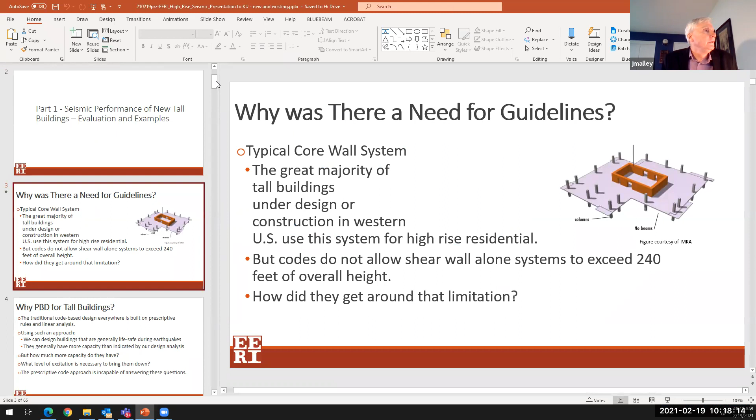Oops. And see if I can. Okay, hopefully I'm still sharing. Still sharing? That look okay? Okay, cool. Great. All right, so let's get into the meat of the presentation then.

Seismic evaluation of tall building projects using performance-based earthquake engineering. Actually, it's not just existing—I should have gotten rid of the word existing, just tall building projects using performance-based earthquake engineering. As I mentioned, there are 2 parts.

The first part is on performance of new tall buildings. I'm going to go through how the process works, and then talk about some specific examples of projects that I've been involved with as a peer reviewer, which is a big part of this whole program.

We use guideline documents, and I'll go into those in a couple of minutes, but a lot of the projects we've been looking at are what we call core wall systems.

Many of the large condominium towers and apartment towers going up in major cities on the West Coast have a primary lateral system that is reinforced concrete shear walls around the elevator, stairs, and mechanical shaft core of the building. This system is not really allowed by our building codes right now in high seismic zones over 240 feet, unless you have a moment frame system, a sort of dual system, which is what's allowed for taller buildings when you want to use a shear wall building.

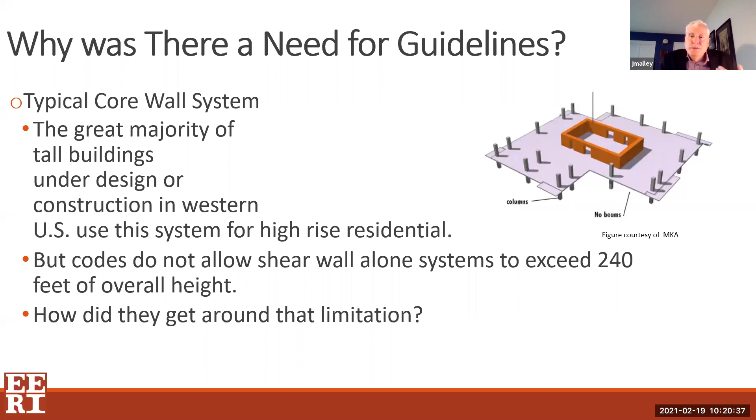Architecturally, that presented challenges with the idea of getting full sight lines from condominiums, etc. They didn't really want a deep reinforced concrete moment frame around the perimeter of the building. So the engineers started to wonder if they could go outside the bounds of the prescriptive building codes and try to do just the core of a reinforced concrete lateral system, and be able to demonstrate that it would perform properly.

Traditional code design is built on prescriptive rules and linear analysis. It's been built up over the last almost 70, 75 years, and it really has grown over time, become more and more complicated, but is still based on some pretty simple concepts.

For earthquake design, we're really trying for life safety for most all the buildings. We really think many of the buildings have more capacity than what we give them credit for in the building code. Again, because it's a fairly simple procedure, you're going to be a little more conservative on things. So we ask questions like: how much capacity do we really have?

We really don't have a great idea how big an earthquake it takes to bring buildings down. We don't want to think about collapse, but we want to know at what point our structures are really going to be vulnerable to severe damage in an earthquake. And the code really can't get us there.

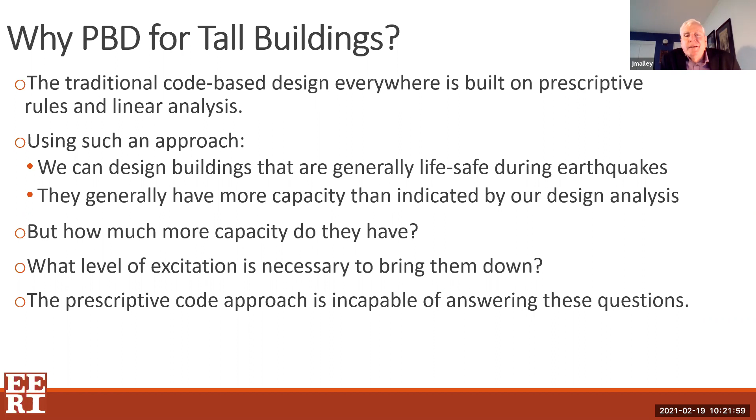So we needed to think about this special class of buildings, because the building code doesn't really address very well long period structures, which have modes of response different from the simple approach covered in the building code. P-delta effects become more important when you get into large displacements, and with longer periods you can have larger displacements. That's an important consideration for the collapse potential of tall buildings.

Obviously these buildings can potentially have large occupancies, especially if used for office buildings. And that could impact not just the building if there's a collapse, but all the surrounding buildings around it. You can imagine having to cordon off after an earthquake. If there was major damage to one of these buildings, you might have to evacuate blocks in all directions around the building.

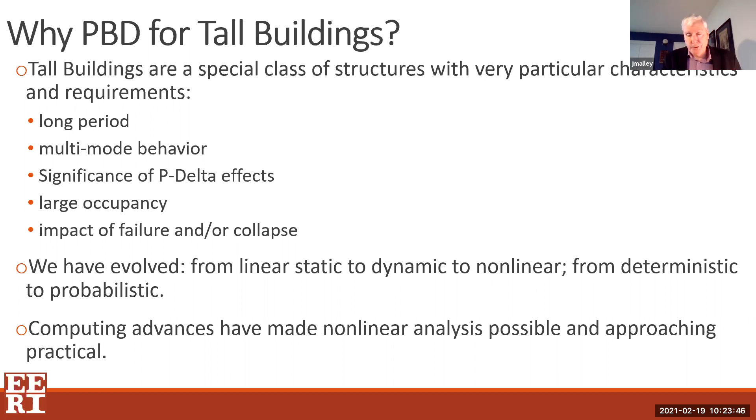We've also come a long way in our ability to do analysis. We go from linear static to linear dynamic to nonlinear static and dynamic, and from deterministic, one level of demand, to probabilistic, using multiple levels of demand to understand building performance. The ability of computers to do calculations we never could do before, and manage data in ways we never could imagine before, really allows us to move forward with this more detailed approach to analysis than ever was possible.

So when you get up to 30, 40, 50 stories, you're talking about a very small fraction of the number of buildings. The fact that building codes do not really target this small sliver of the pie makes sense, right? Engineers recognize that now, and we're trying to search out better ways to design these buildings.

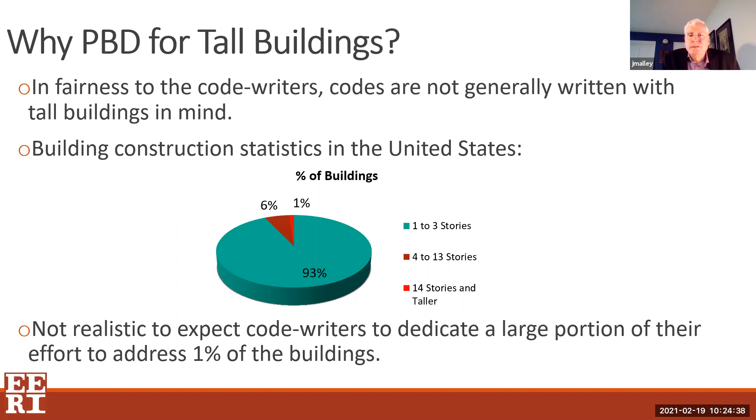So understanding system performance outside of building code definitions becomes very challenging. There are some ways to do it. There's a FEMA P695 approach, which requires hundreds and hundreds of nonlinear analyses, maybe thousands and thousands, to pre-qualify a new building system. For an individual building, that just doesn't make sense.

So we wanted a more reasonable approach using what we call capacity-based approaches to design, which are incorporated into the building code in many ways, and continue that in looking at some of these more unique structures. Really, one of the important things is to think about is that for earthquakes, it's much more important to think about deformations than it is about forces.

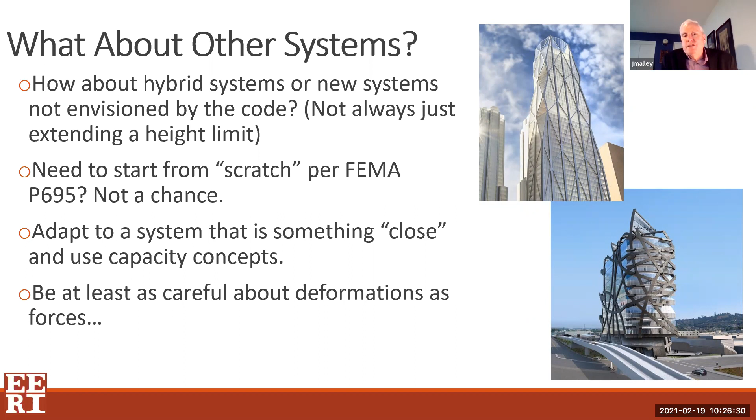Most of the building code requirements are force-based because, again, they go back far into the distant past. But really, when we think about earthquakes, we want to be controlling deformations, because deformations -- that P-delta movement -- is what really brings buildings down. And so that's what we have to be focused on.

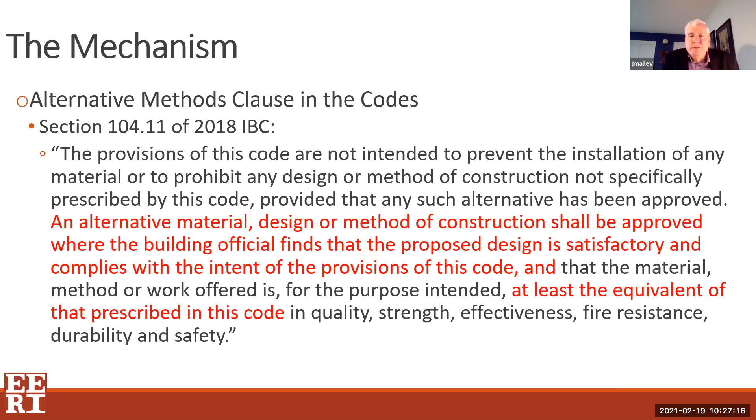So ASCE 7 has a similar clause that allows the engineer to bring forward new ideas and to bring forward an approach or a system that's not specifically permitted by Table 12.2.1, which lists all the permitted systems, if you can show that you have similar performance that you would have from one of the defined systems.

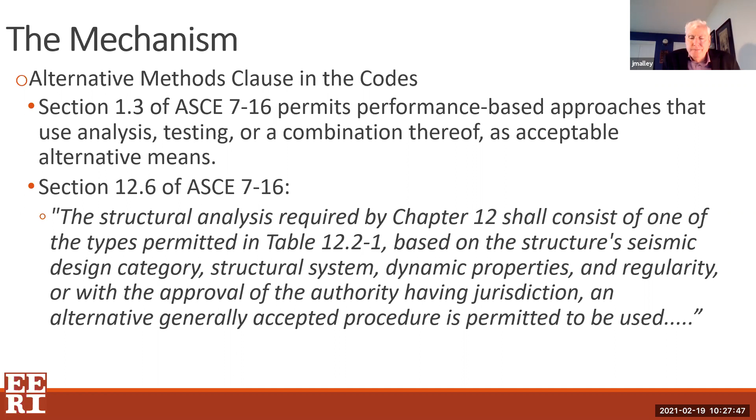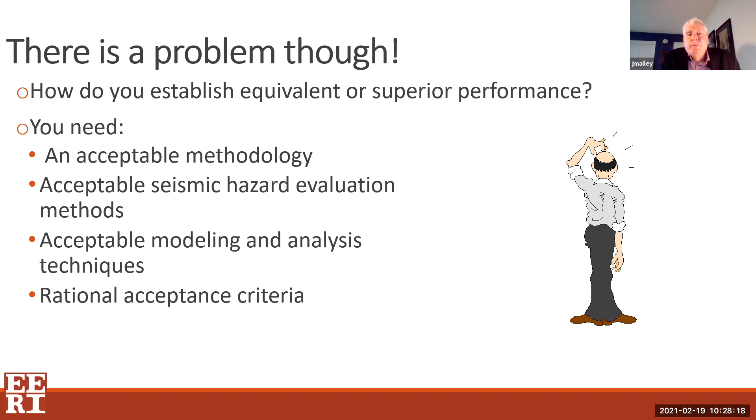But there's somewhat of a problem with this. How do you establish equivalency, or establish if it's even better than what code performance is? You need some kind of methodology—how do you establish what's the acceptable seismic hazard, what are the methods to do that, what's the acceptable modeling and analysis techniques, since we are going beyond linear analysis now, and what's a rational acceptance criteria.

Guidelines have been established over the last 10 or so years. The two primary ones are the PEER, which is the Pacific Earthquake Engineering Research Center Tall Buildings Initiative guidelines, as well as the Los Angeles Tall Building Structural Design Council guideline document.

Some cities, like San Francisco, have put together administrative guidance on how to do this, but not the technical work. And the fourth document is from the Council on Tall Buildings and Urban Habitat on tall building design. It's very general—good information, but really isn't directly helpful to engineers trying to accomplish one of these designs.

As I mentioned, the PEER Tall Buildings Initiative guideline and the LATB SDC guideline are the two most widely used. They work with ASCE 7 as well as ASCE 41, which is a document on the seismic evaluation and retrofit of existing buildings that has a lot of performance-based concepts in it, and some ATC documents sponsored by NIST on nonlinear modeling approaches.

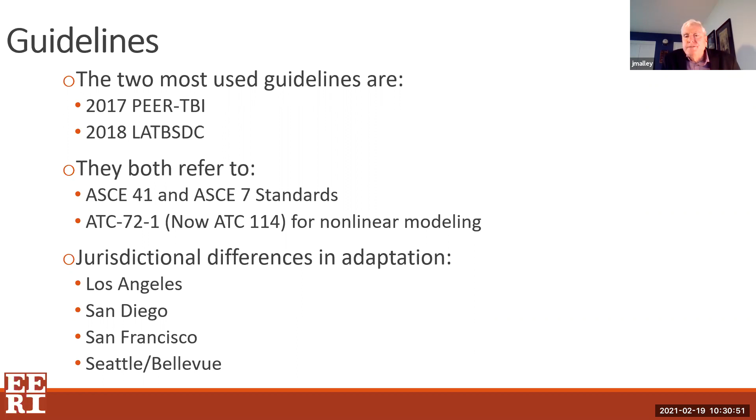Each of the jurisdictions I've worked with deal with this a little bit differently. One thing common to all the programs or cities is that they get a peer review panel—generally one or two engineers, a practicing structural engineer, oftentimes an academic that has expertise in the type of structural system being proposed for the building, as well as someone who's an expert in ground motion development, because we have to develop ground motions to simulate the kinds of earthquakes the building will be subjected to. Each does that a little bit differently, but that program is always in place.

Performance objectives are a little bit different for the guidelines than code-based approaches, where we generally have one level where we look at a 10 in 50, or 475-year return period event. For the two guideline documents we work with, mostly the PEER and the LA Tall Buildings, we have two levels. We have a serviceability earthquake, which is a pretty small earthquake, frankly—50% in 30-year chance of exceedance. And for that earthquake, we basically say the building needs to remain elastic.

So we check it using elastic procedures to make sure essentially that the building is performing, or the models are performing the way we would think they should, since we have a lot of background in elastic analysis.

And then going forward to the very rare event, which is what we call the maximum considered earthquake—that's a 2% in 50 return period generally, a very large earthquake, the largest you would consider possible in the region you're in.

The ASCE 7 Chapter 16 now has guidance on how to develop that. It didn't in the past—that was partly developed by the guidelines, and then ASCE 7 picked that up from the PEER TBI and the LA Tall Buildings guidelines. So that's now in the code, which is nice.

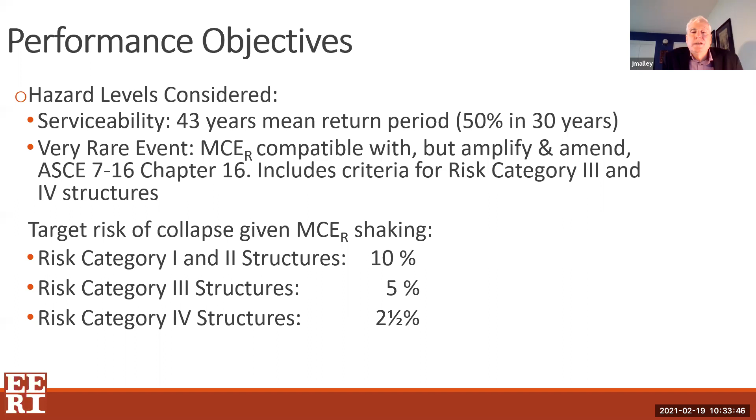You can see the targeted risk of collapse for the different categories at the bottom. As we get out to risk category 4, we're talking about a 2.5% chance of exceedance, or risk of collapse, given this very large earthquake. So still a very small chance of collapse, even given the largest earthquake that could occur in the region.

Talked about capacity design. I mentioned that a little bit ago. Very important conceptually as we're putting together seismic design systems and configurations for buildings. We'll talk a little bit about that in the next couple of slides.

The idea is that we want to control where the nonlinear response in the building is going to occur during the earthquake. We can't design for the biggest earthquake considered for the building to remain completely elastic, because we wouldn't be able to design real buildings in effect—there'd be so much structure that there wouldn't be any windows and things like that. Nuclear power plants are about the only thing designed to be elastic for this very large earthquake. So we know we're going to have some inelastic behavior.

We want to control where that's going to be, and make sure that everything else around those inelastic elements remains elastic, so they hold up the rest of the building. So that covers some of those things.

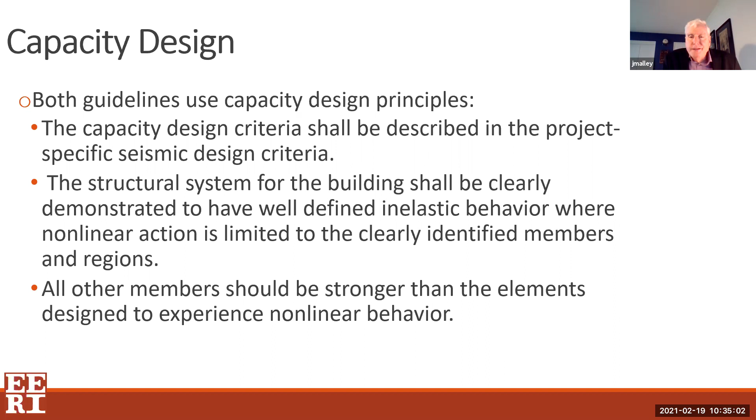What we do then is classify the structural actions as either force controlled or deformation controlled. The deformation controlled elements are the ones we expect to yield and deform nonlinearly in an earthquake. The force controlled elements stay elastic, and are made stronger than the deformation controlled elements they're connected to, so we limit the demand on those elements. There are 3 categories for force control, as you'll see in a second.

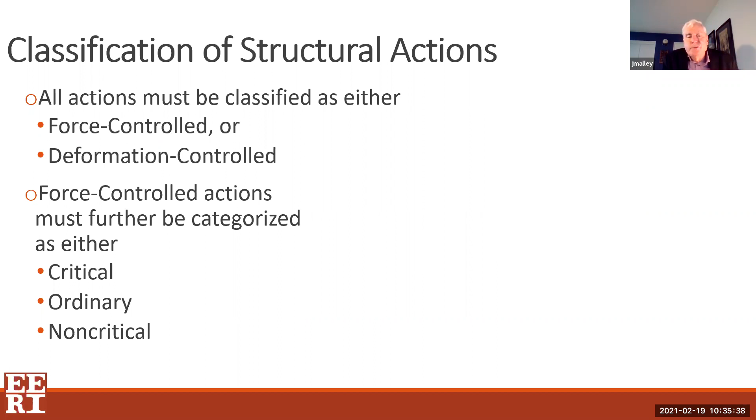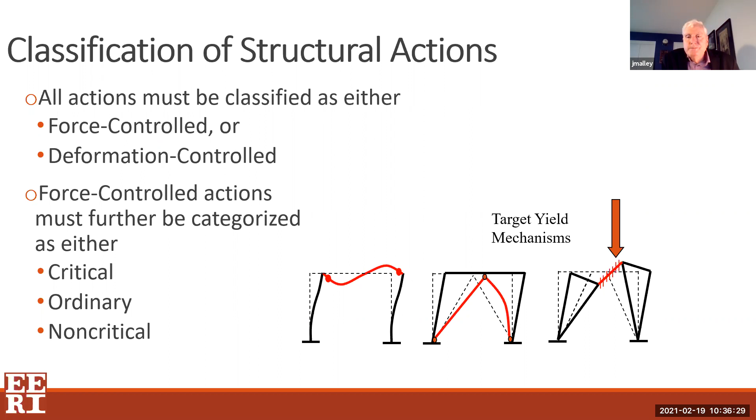When we think about the deformation controlled elements in our nonlinear models, we let those go nonlinear. We watch their deformations and make sure they are within the bounds of what these elements have been demonstrated to deliver in tests done at universities around the country—whether it's a moment frame connection, a link beam in an eccentric brace frame, or the buckling deformations in a buckling restrained brace frame system.

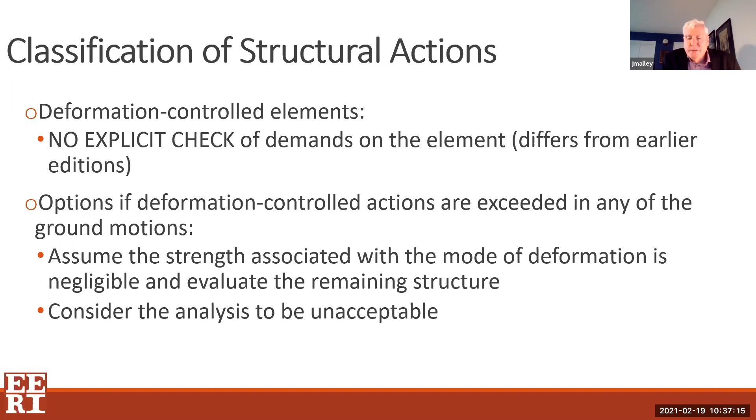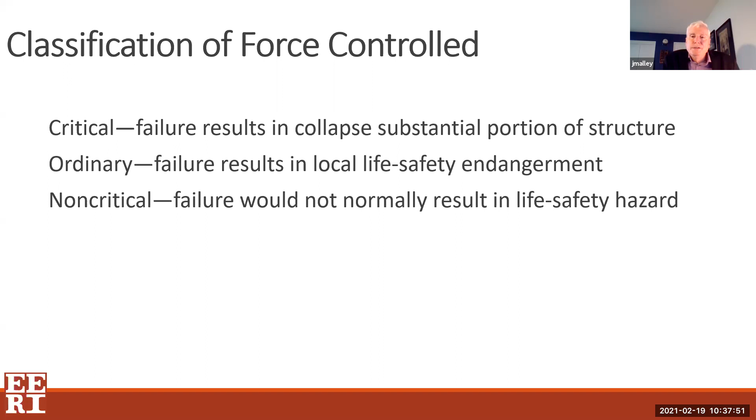Let's see, I think we can just go past that. On the force controlled side, we talk about critical, ordinary, and non-critical elements. If it's a critical element, its failure could result in a major collapse of the building—imagine a very important column would be a critical element. Some of the other elements are checked for less demanding criteria; if we lose them, we don't really feel there's a significant life safety hazard.

When we look at the ground motions, we have different criteria depending on what risk category you're in. On many tall buildings now, we generally do 2 suites of 11 ground motions. We can't get into why 11—it's a strange number, but there's statistics behind it. We generally use 2 suites because there's a significant second mode of response that can control the design; if you only do 1 suite, the ground motions won't be targeted or characteristic to the 2 primary modes of response. So we've moved to what we call a conditional mean spectrum approach, or multi-suite approach.

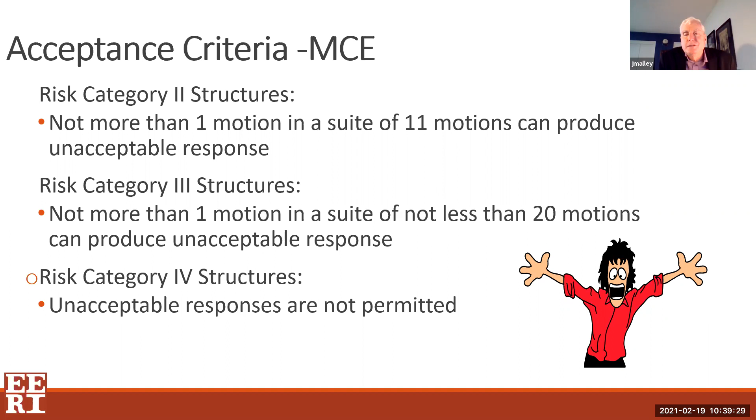So when we do these nonlinear analyses, if you run into one ground motion that seems to go beyond what we consider acceptable deformations in the structure, we've determined you can still be demonstrated to have that acceptable level of chance of collapse given the MCE earthquake. For the higher risk category, we don't allow any of those ground motions to exceed the criteria, unless on risk category 3, you use 20 ground motions instead of 11, which doesn't really seem to happen in practice.

Okay, analysis. So there are a number of checks we have to make on each individual analysis, and I won't read through all of those, for whether or not the model has given us acceptable performance. A couple of the key ones are the maximum drift the building goes through, the interstory drift, which is the deformation between two stories, or the residual story drift.

So that's when the earthquake is over, and if there is some out-of-plumbness of the building due to residual drift. This is the first time in seismic engineering in the United States that we've ever been able to check, or been asked to check, on residual drift. And it's a very hard thing for us to estimate accurately—I'm still not convinced we do it that accurately. Generally, most of the buildings we look at, the residual drift doesn't seem to control, which is good, because like I said, I'm pretty skeptical about our ability to predict this.

But it's the first, and I think it's a really important thing, because after the earthquake, if you're standing across the street from a tall building and you can see it leaning over, if you're the building official, what are you going to do? Are you going to evacuate 8 square blocks or whatever, because that building, if there's an aftershock, might not have the capacity left to resist a major aftershock. So luckily we haven't had to deal with anything like that in past earthquakes, but in the next earthquake we may not be so lucky.

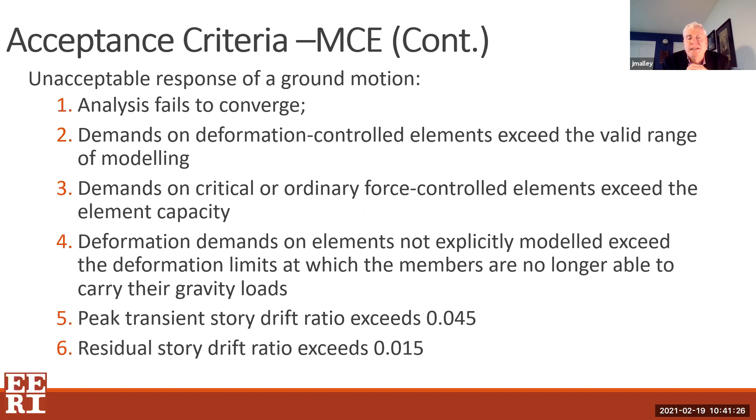Okay, let's go here. So on evaluation procedures, we need to develop 3-dimensional models. We need to put together realistic estimates of stiffness, strength, damping, etc. And then damping is pretty tricky for these nonlinear analyses, because a lot of what we consider damping in our elastic models, where we use a simple rule like 5% viscous damping...

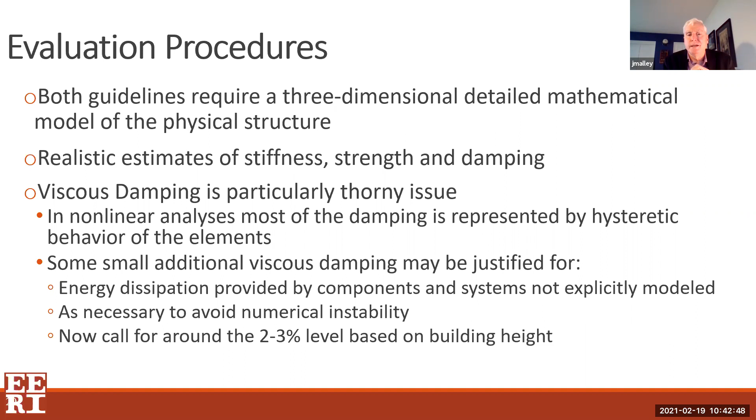That includes the consideration of the inelastic or hysteretic response of the structure, where it's dissipating energy by yielding in those various deformation-controlled elements. So when we do a nonlinear analysis, we have to pull that out and then try to get the other type of viscous damping that could be in the building from other elements that are not part of the lateral or structural system we consider. Cladding, for example, can provide some damping, along with other parts of the structure. Generally we're down in the 2% range, especially for the tall buildings we're working with, as the damping. So that's always a point of discussion when we get into the review of these buildings.

So then we have these nonlinear models, and generally we use what we call concentrated plasticity models—so like a plastic hinge, if you will, for beams and columns, to estimate the nonlinear response of that element.

For walls, we use what are called fiber models, where you can imagine if you've got a wall, you would have a series of fibers that would estimate the strain and force demands that fiber goes through when the wall goes through lateral response. It has some yielding elements so you can watch the yielding go through the different parts of the wall. So it gets into a lot more complicated modeling than we typically do with our elastic models.

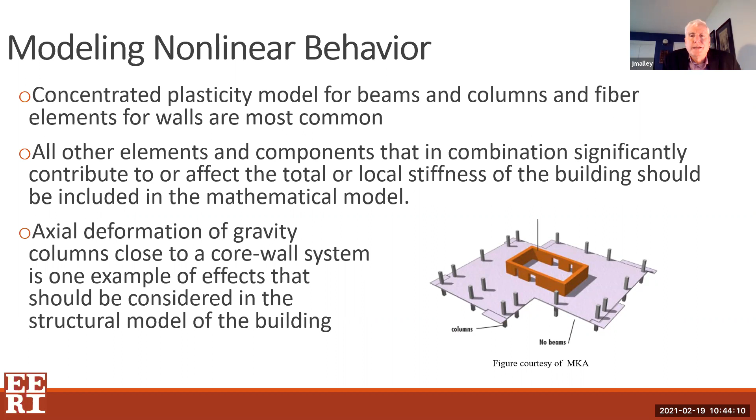Let's see—so axial deformation of gravity columns can be important in these taller buildings and often needs to be considered in the model. I'll talk a little bit about that in some case studies here in a second. One thing that's very important for tall buildings is that generally when they hit the ground level, they oftentimes increase in size, and we call them podiums.

They could be like a retail space for a couple of floors, or offices, etc. Parking garages also sometimes are above grade, or they could be below grade. So the structural system has this change in its characteristics in many of these taller buildings.

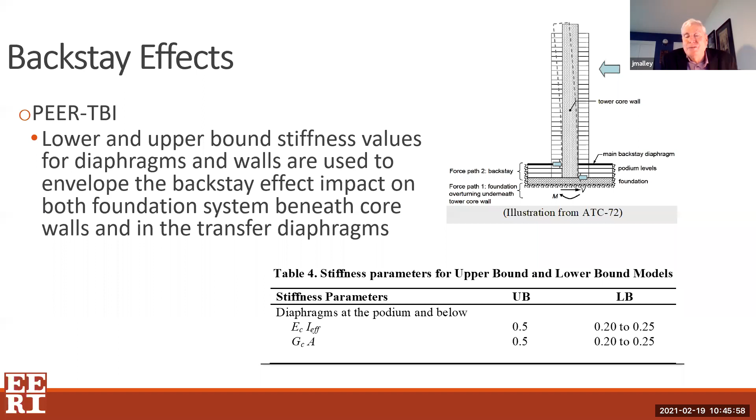That transfer diaphragm is probably the most important element in the entire building to understand its performance, because it can potentially have huge forces in it. If we don't design it properly, the whole system could kind of disintegrate and have a response that we weren't planning on. So we do a lot of extra study on these transfer diaphragms, different considerations of stiffness and strength, and some very detailed strut and tie type analyses a lot of times. They're often very thick, sometimes up to 18 inches thick. I've seen even 24 inches thick in some cases.

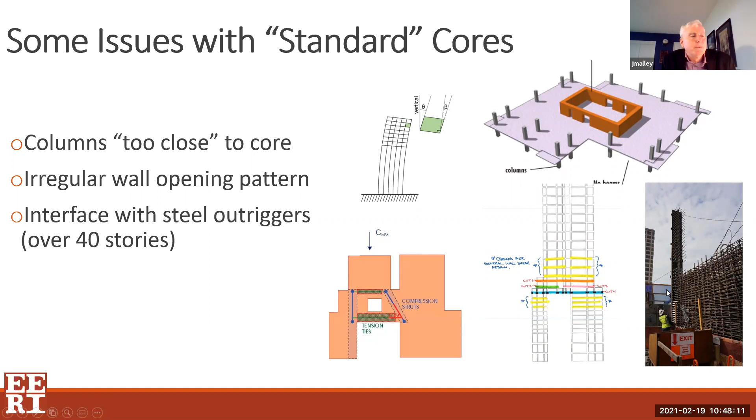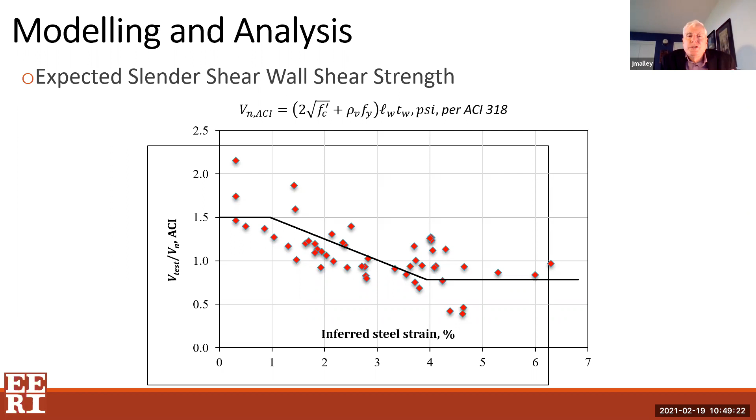So we can take advantage of that because many of these shear walls are fairly slender. We really are reaching out for as much strength as we can when we're doing these performance-based type designs.

Okay, well, let's get into some of the peer reviews that I've done over the past 15 or 20 years on various types of projects, not all tall, but they all had some very interesting things to deal with.

It's on probably the worst soil almost in all of San Francisco. I think about maybe 30 or 40% of the cost of the structure was the foundation because it was on such horrible soil. It was so bad that they had to put in special foundations under, even the field would have sunk. So they had to put a foundation under not just the structure, but the field itself, because the ground was so bad.

It's an interesting structure in that it is a combination of concrete and steel. The architect wanted all of the exposed structure, while you're sitting in your seat or in the concourses, to be steel, because he was trying to evoke older stadium designs from the Wrigley Field or Fenway Park days. But the engineer thought it was going to be more economical to use a concrete type frame structure. So there were some interesting challenges with the interaction between the steel and the concrete.

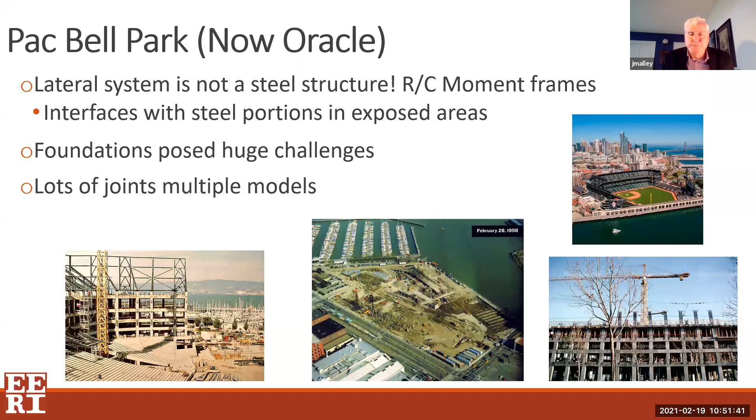Another one that was very interesting in San Francisco is the De Young Museum, which is in Golden Gate Park, not too far from the ocean. Very interesting project architecturally. One of the things that's interesting about museums is base isolation technology. Base isolation is used to separate the movement of the ground from the structure above the isolation plane. Museums are a great candidate for isolation because the contents are invaluable in many cases. It's not only protecting the structure, but it also reduces the demand or shaking intensity above the isolation plane, to the point where you can protect fragile items like porcelain and glassware from being damaged in an earthquake.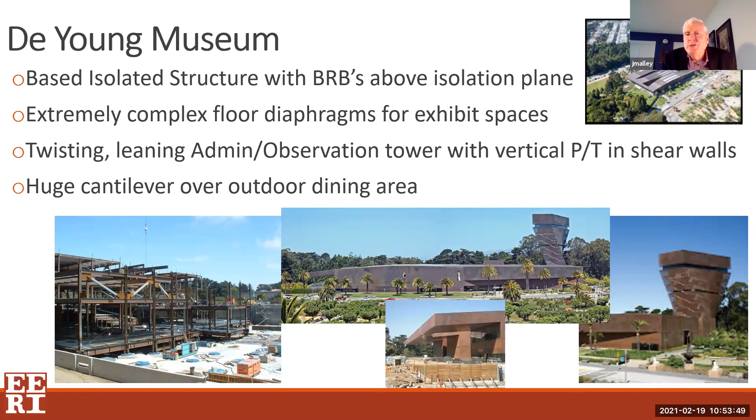So in this case, they isolated the main museum. They also had a very complex observatory tower, which you can see on the far right, that sort of twisted and leaned as it went up. It had a tendency to potentially ratchet because the center of mass and the center of stiffness - the core was vertical, but the center of mass changed along the height of the building and twisted. So if the earthquake started, it could have torsional modes that might have twisted it into very damaging processes. What the engineer did, which I thought was a great idea, was put vertical post-tensioning into the concrete core in order to avoid that ratcheting type of behavior, because the mass was changing over the height of the building. Really an interesting project to look at.

LA Live is down in downtown Los Angeles. It's 54 stories. It's the tallest steel plate shear wall building in the world. The idea with steel plate shear walls was replacing the concrete core walls. Architecturally, they were looking at an all-steel building, but originally the engineer thought, well, I'll just do concrete cores with steel frames. The steel fabricator and the general contractor said that creates a real problem for construction when you're sharing the trades like that. The integration between concrete and steel can present challenges because tolerances are tighter on steel than on concrete, and then the steel has to connect to the concrete. There can be all kinds of problems during construction. So they went with the steel plate shear wall in this case.

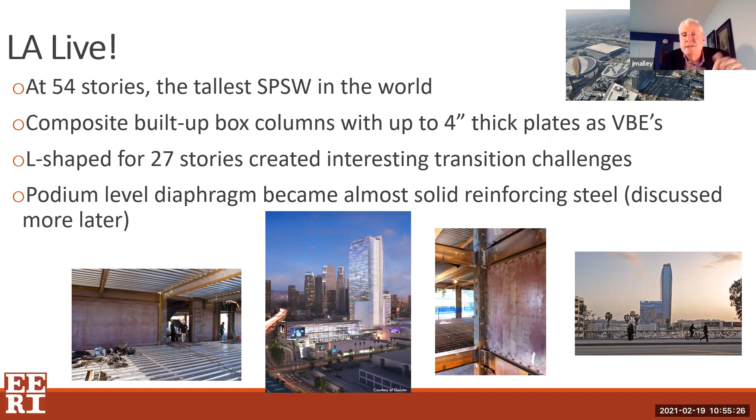It's an L-shaped building for 27 stories, and then just a tower for the condominiums above level 27. You can kind of see that in the picture on the lower right. There's a hotel that does the 27-story part of the L. So there are some interesting diaphragm challenges - there's a transfer diaphragm at the roof of the low rise that creates interesting force challenges, as well as down at the ground floor. We can talk through that as we go forward.

One of the things that was interesting about the analysis here was that, generally to ease the design process, design engineers typically assume rigid diaphragms.

It helps to cut down the size of the analysis and the speed that you can do it. Unfortunately, in this case, when they had that L connecting in at those upper floors, there was going to be some major force transfers at that low roof.

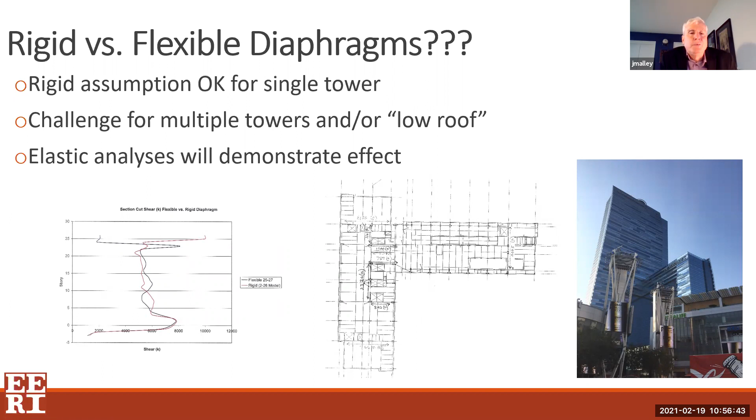So the engineer had to modify their diaphragm design to use what we call flexible or semi-rigid, or they had to model the stiffness of the diaphragms in that region above and below that transfer at the roof, in order to make sure that they properly captured how those forces were going to transfer between the core walls that are in the main tower, and then there's a lateral element out here, a small core for the hotel part of the tower. So again, a little bit of a challenge for that building.

Wilshire Grand is the tallest building west of Chicago at about 72 stories, downtown Los Angeles. This is one of the buildings where they went with a combination of steel and a concrete core. It's a very narrow building in the short direction.

So we had to do what we call outriggers, and I'll go into that a little bit more in the next slide. But they also use what we call belt trusses around the perimeter at the outrigger level, to help equal out the forces in the columns all the way around the perimeter, to get better performance overall in the building. It used what we call submerged arc welding in the field for some of these. There were some massive, like 2-story tall gusset plates to connect, and I'll show those on the next slide, to connect one of the outrigger braces into the core. This was a technique that let them do that welding much more quickly.

Also had the largest concrete pour in the history of the world. I think it still is. It was a 21-foot thick mat over the entire footprint of the building, and it was 22,000 yards of concrete that was poured in one continuous pour that took place over about 12 hours.

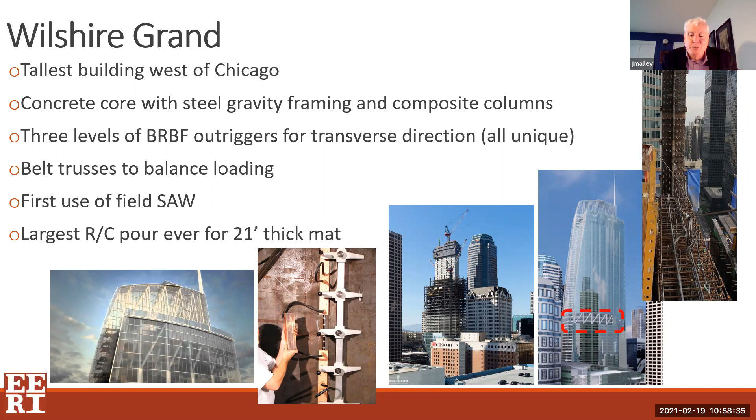One truck of concrete is about 10 yards. So 2,200 trucks of concrete came into that site between midnight and 10 o'clock in the morning on a Saturday.

So this outrigger concept is important for very tall buildings that are narrow. You can see here on the Wilshire Grand project, a graphic on the left. It is so narrow that they had to have 3 different outriggers. What it does is it basically makes the whole structure resist the overturning forces on the structure from either wind or seismic. In this case, the wind was very important in that broad direction, the broad up and down on this bottom sketch, pushing wind in this direction, very narrow in the short direction.

So that basically increases the depth of the structural system out to the full depth of the building, reducing the building period from 11 seconds, which is really not good for tall building design - it's really too far, we don't really feel comfortable for that long a period, down to 7 seconds. So we're increasing the overall stiffness of the building by a factor of 2.5 in order to get that reduction.

So the concept on the outriggers is that you carry the loads out from the core wall through diagonal braces out to these exterior columns, and then you get a wider stance for the resistance. I talked about that submerged arc welding - it was over this story-deep plus gusset plate between these buckling restrained braces, which were used here and are often used for outriggers because with buckling restrained braces we can control the compression capacity and the tension capacity, and that limits the demand on the outrigger columns. So you get a more efficient design. That's a pretty common way to use outriggers.

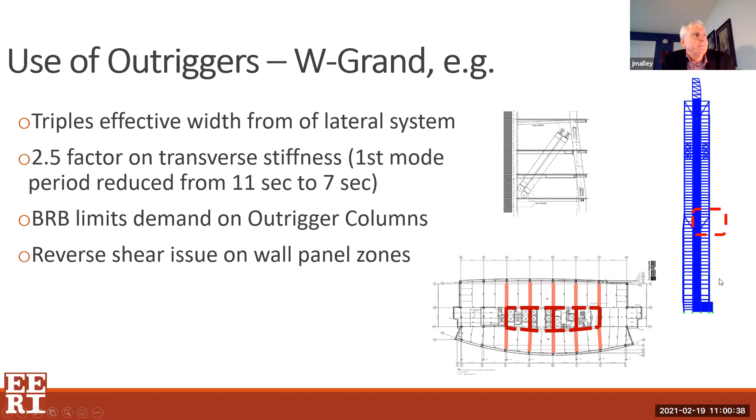Okay, 181 Fremont is in San Francisco. Very interesting architectural design, it's about 54 stories. Basically, it's such a narrow footprint that the lateral system is a perimeter system. There's no core wall in this building. It would basically take almost the whole footprint in order to have that type of core wall.

So what they did was they had a series of what they call mega braces - 4 braces over 54 stories. Actually, I think the architecture changed to only 3 braces over 54 stories. These braces were, there was a moment frame as well as this exterior brace frame around the perimeter.

What they call the mega braces included as part of it was, say this is an 18-story long brace: the first two or three stories were a buckling restrained brace, then there was an elastic element, and then there was a damper placed up at the other end of the brace. The damper was important, not for the major earthquake, but for wind, so people wouldn't get seasick in the upper stories of the building when a good windstorm came through. The damping would reduce that motion. In the big earthquake, it has a locking system so that the damper locks up and the BRB works and yields and helps take the deformations in the building.

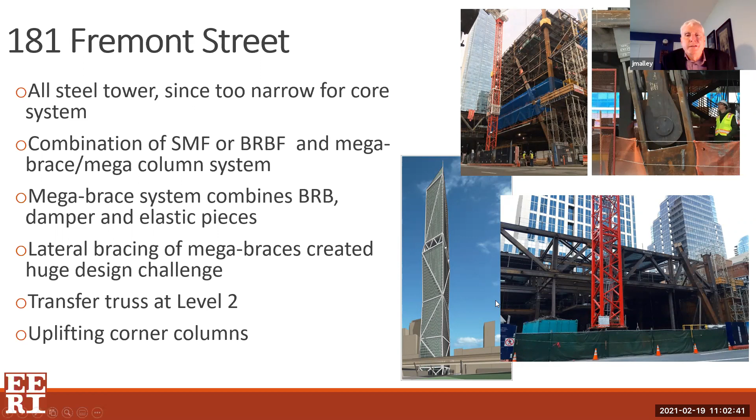Oceanwide Plaza is in downtown Los Angeles. It has three different towers on a single podium, and that creates a lot of challenge for the transfer diaphragms between the three buildings and how those are going to be shaking independently and loading up the transfer diaphragms. The two shorter towers are connected for about 8 stories above the podium. The foundation mat, basement, all those elements were quite challenging, and it's a full city block, so it's quite a large project.

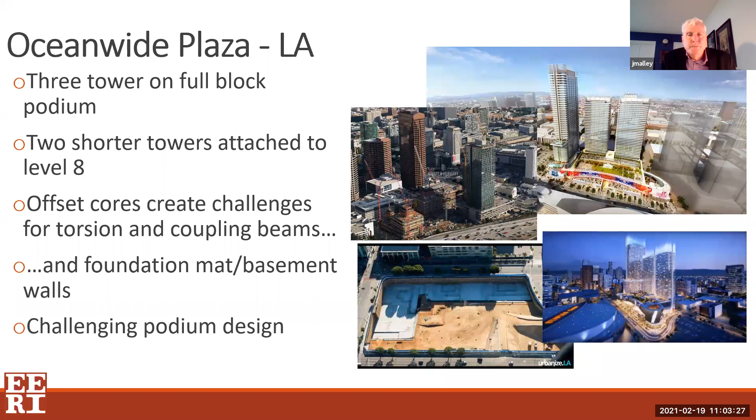That transfer issue is highlighted down here on the bottom, where we've got the main two cores in the main tower, and then a core around each of the smaller towers, loading this large podium that also has perimeter shear walls. How you do the interaction of those and design them can become quite challenging.

Some other interesting podium transfer challenges on the LA Live project here on the upper right. This is actually in Professor Jack Moehle's book. He was one of the peer reviewers with me on that project.

The architecture said that the cores were here where the main lateral shear walls were for the tower. And then when they hit the podium level, the architects for some reason needed the escalator to get from the basement stories to the main plaza level, right adjacent to where the main force transfer needed to be, to get the loads out of the core, the tower cores, and deliver them into the large podium. So instead of delivering it back through where it wanted to go into the main part of the podium diaphragm, they had to take the loads out into this shorter region, use a strut and tie model to push the forces to either side of the openings, and then drag it back into the main body of the transfer diaphragm.

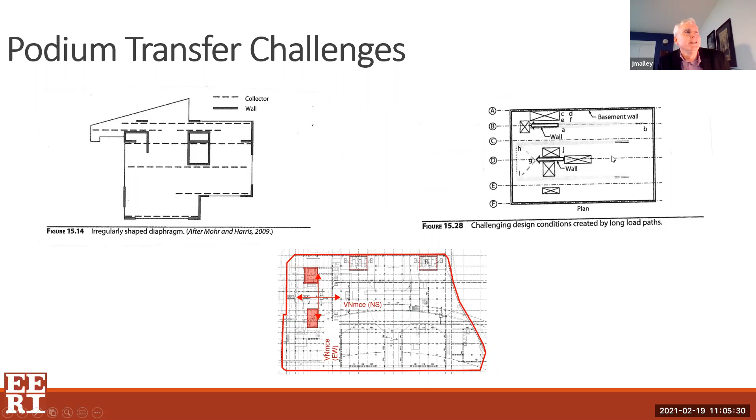Tremendous. I've never seen so much rebar in any piece of concrete in my life as in this transfer diaphragm. So architecturally, if they could have moved that over 3 or 4 feet, they could have avoided all that challenge to the engineer, but apparently not. Anyway, those kinds of things happen in these podiums.

Some risk category issues on that Oceanwide project: the towers themselves could be categorized as risk category 2 because they're condominium towers, not that many people involved. But once the building hit the podium level, all 3 of the towers count as being part of the occupancy for that. So what the city ended up saying was, okay, you can design the towers above the podium as risk category 2, but then everything from the podium down has to be risk category 3. So the engineer had to go through lots of different analyses to check the towers, and then differently to check the podium and the foundation.

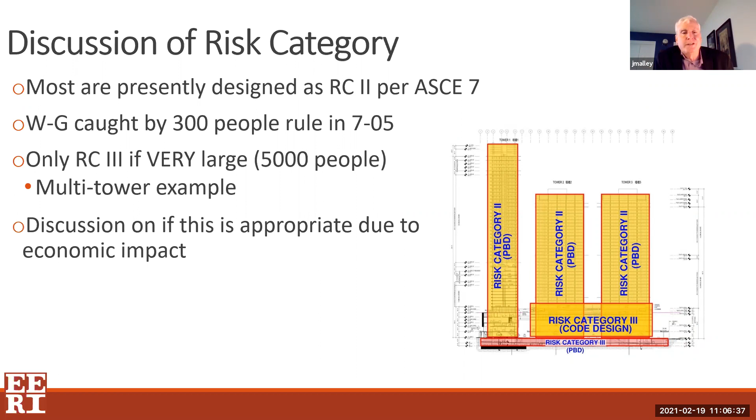So kind of a strange approach, doesn't really make any rational sense from an engineering perspective, but from a code perspective, the jurisdiction felt like that was the best way to deal with one of these multi-tower systems.

So Rainier Square is in Seattle. It's an 850-foot tower, now the second tallest building in Seattle. Very unique architecture here, you can kind of see the swooping architecture. And the other thing that's probably most important about it is it's the first application of a new system that AISC is now calling Speed Core for marketing purposes. What it is, is a sandwich plate system where you have a steel plate on two sides separated by tie rods in between at close spacing.

And then you fill the center part with concrete. You can kind of see that graphically here from some tests at the University of Buffalo. The nice thing about this is you don't have to have rebar. It's just poured concrete, and the steel acts as the reinforcing. So it can be quite an economical system.

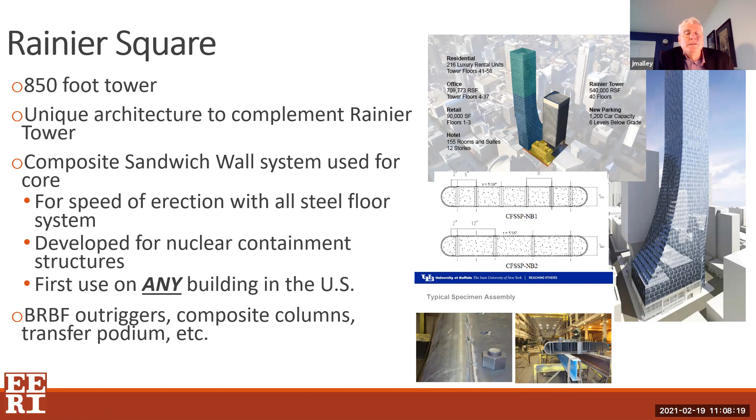I mentioned the challenge between steel framing systems with concrete cores. This allows the steel fabricator erector to have control over the entire building height and not have to work directly with a concrete sub, because all the concrete sub has to do is pour concrete down the inside of the voids between the steel plates. It worked out—it saved about 11 months in construction of this building because of that change in philosophy. Very interesting design, a lot of fun to work on.

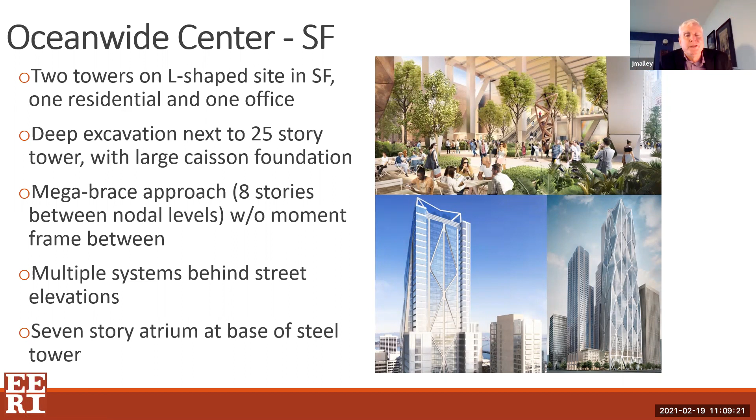Oceanwide Center is in San Francisco. This building is under construction right now—some more of this exterior mega brace type of approach, with some faceted architecture on the front of the building. There's two towers: a condominium tower in concrete, as well as the 50-story steel building. Probably the most interesting part about this design is the first six stories are open—like an open plaza underneath 50 stories of office tower on top. It's intended to be a gathering area for people to have lunch or do whatever, and then enter the building. The first occupied floor is the 7th floor. So it's an interesting system to try and make sure the whole entire building works together.

And then last but not least, the Wrapper Tower. This is being erected right now down in Los Angeles near the LA airport. It's supposed to evoke the bird's nest down in Beijing, if you remember the Olympic Stadium. It's a series of built-up boxes of steel, 2 feet wide by 1 foot deep, that wrap the building. On the back side of the building, there's a steel plate shear wall core for the elevators and the vertical transportation. It's about 2 miles from a major fault in Southern California, the Newport-Inglewood fault.

So this building is very complicated. We essentially had to tell the engineer of record that we probably didn't know how we could ever approve such a building unless it was base isolated and we could make the rest of the system elastic. Everything above the isolators is designed to be elastic in the earthquake. That was about the only way we could ever imagine we would understand the behavior of the building well enough to let the project go forward.

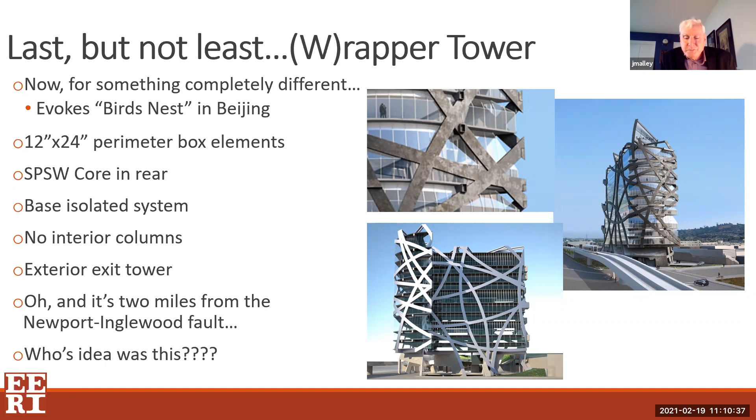So finishing up part 1—sorry, this has been going a little longer than I wanted. It's the longer part, but some interesting challenges on similar projects. The performance-based guidelines give us a mechanism to make this all happen. It takes great interaction between the engineer of record and the peer review panel. We're continuing to update these documents from what we learned on past projects, and it helps us be innovative—really a lot of fun on many of these projects to be involved with.

I've got to plug my battery computer back in.

Okay, so let's jump on to part 2 on taller, older buildings. There was an article in the New York Times in April of 2018 called San Francisco's Big Seismic Gamble. It focused on some of these older tall steel buildings in San Francisco and the fact that they may be vulnerable to significant damage because they had been designed prior to the Northridge earthquake, prior to the present standards that we're using.

And this led to a lot of analysis work for us. I joked that I should have sent a couple of cases of wine anonymously to the author of that article, because we ended up getting a lot of very interesting projects as a result of this newspaper article.

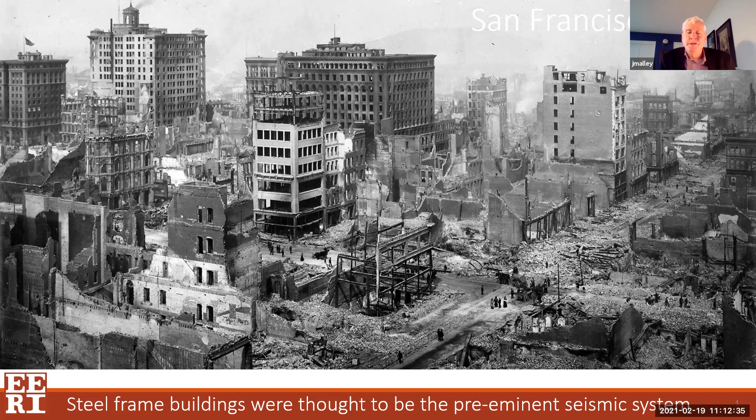So think about San Francisco and steel buildings in the 1906 earthquake. The buildings that really resisted the earthquake without collapse were steel, sort of moment frame type buildings—different, obviously, than what we do today, because they had brick infill, riveted steel frames, those sorts of things. We'll talk about that. But really, we thought steel buildings were sort of the best for earthquake performance.

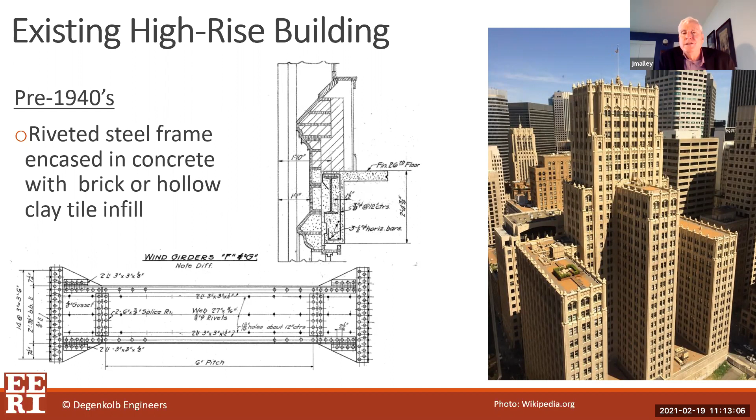As we go through, we see the design of these buildings changing over time. They started out being composite brick exterior walls with steel riveted frames designed primarily for wind forces. But they did well in the 1906 earthquake, and engineers felt like they could continue to do well.

Then the process changed in the 1950s and 60s. We got away from using masonry for the perimeter systems and went to more fully steel systems, with all bolted connections. There wasn't any field welding available in the 50s, so high strength bolting was used instead. All the connections, whether beam column joints or column splices, were done with bolted connections. Many times these were dual systems where engineers would put concrete walls around the stair towers and elevator cores to get concrete and steel resisting the earthquakes.

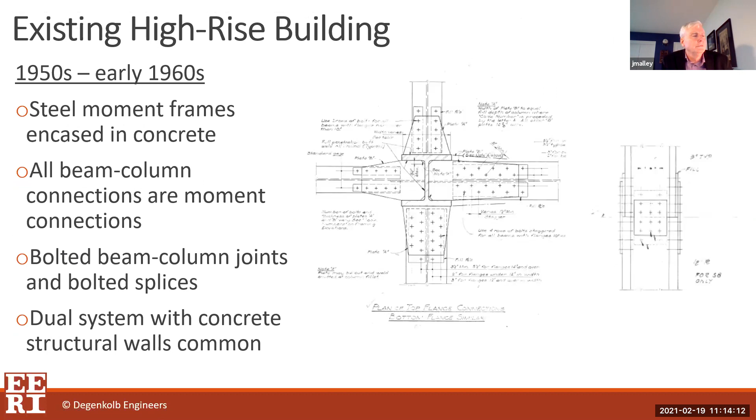In the 1960s, engineers continued to change the design of those buildings to start incorporating welding in the connections. In the early to mid 60s, the connections of the beam column joints were fully welded, where they welded the beam flanges to the column flanges, as well as the web of the beam into the column face.

Column splices also started to be welded. Most of those were what we call partial penetration splice welds, meaning they didn't weld the full thickness of the steel across the splice, just part of it. That's created some problems for us going forward.

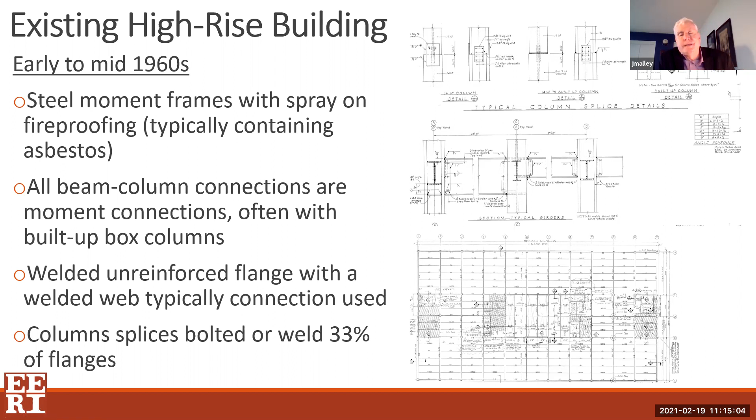Moving into the 1970s, and in the 60s, people would make moment connections at every beam column joint in both directions. As they moved into the 70s, they started to do more perimeter systems, and then went to a bolted connection. This was tested at Berkeley in the early 1970s and seemed to give pretty good performance.

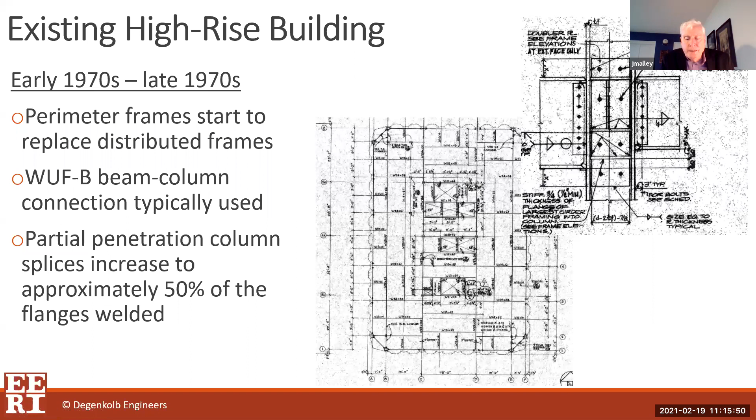Engineers found this was a more economical system than the fully welded system. They'd weld the flanges but bolt the web connection, making it a little more economical. So engineers went with that direction in the 1970s, continuing to use partial penetration welds.

In the 80s, we really started to see much more of the perimeter system, where the interior columns would just be for gravity loads, with more perimeter type moment frames. So you're getting less redundancy in the system, and larger members, larger connections, larger columns, larger welds, etc.

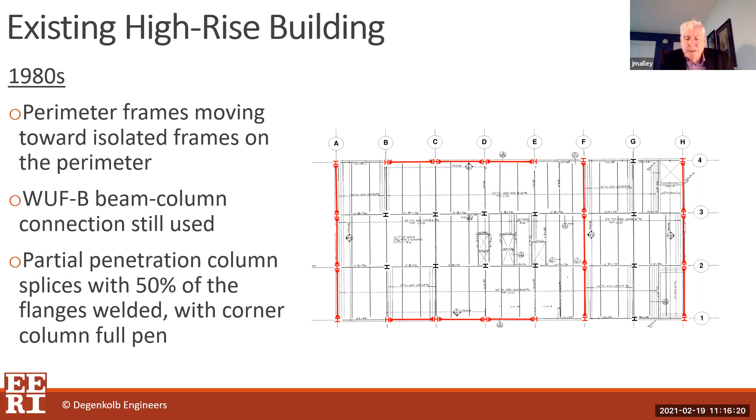Also in the 80s, this was the first time engineers were really able to do linear elastic analysis on larger structures with computers. So engineers got a little more aggressive with what they told architects they could design for, because now they could put this kind of frame into their elastic analysis model and allow things like transfer girders.

You can see this is a hotel where closely spaced columns are in the hotel floors, but when you get to the banquet levels and meeting room levels, they wanted more open ballroom space. So they took out a bunch of columns with transfer girders.

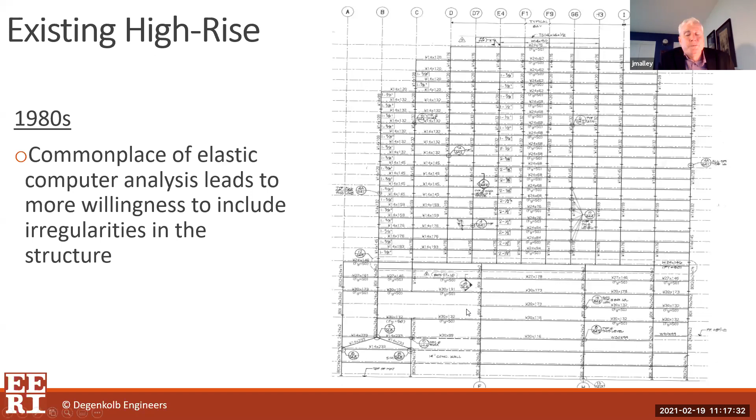So you've got some changes in the lateral system now. Here's one on the left where they had to have an open space, so they put a couple of diagonals to transfer a column out. These kinds of irregularities aren't really friendly to seismic response and performance, creating pretty challenging things to deal with when you have to do a nonlinear analysis.

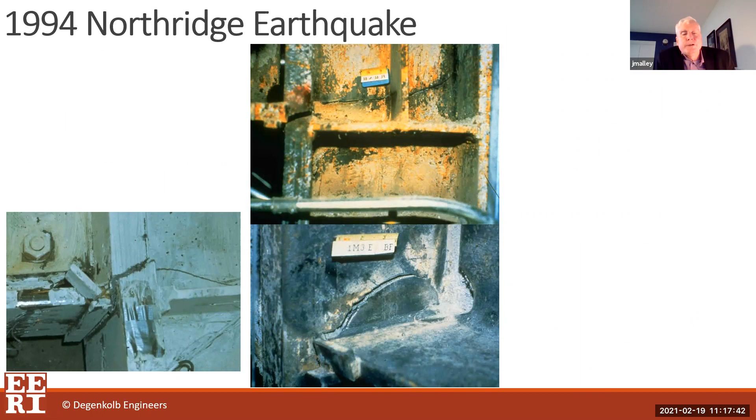We thought everything was fine and dandy with our designs until the Northridge earthquake in 1994, when a number of steel moment frames of this bolted web, welded flange type of construction had column fractures and beam fractures. You can see examples here: this is the beam flange, this is the column flange, this is the web of the beam.

Literally a chunk of the column flange was pulled out by the earthquake in a fracture. Here's another one where the beam flange is to the left, column flange standing vertical, beam web. You can see the fracture almost all the way through across the entire column. This created such damage that this particular building was torn down.

It did have that residual drift I talked about earlier. In the first story, it was about 4 inches out of plumb. It was only a 2-story building, so they basically tore it down.

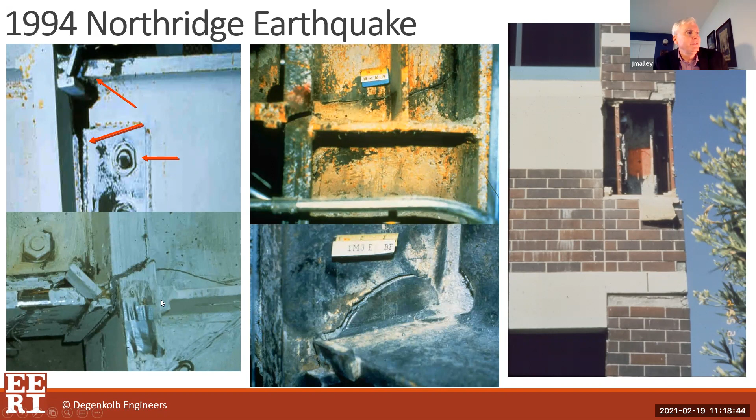But we were able to reproduce some of these fractures in the lab with research right after the earthquake. That really set the steel industry on its ear a little bit, trying to understand this, and really changed all of our building codes for new construction.

For existing buildings, there weren't really any standards at that time. They were starting to be developed, and now we're working with some of the existing buildings. One of the things we found in doing these studies is that different challenges are presented by the different structural systems used by the engineers at the time they were built. Some things were better in the old days, some things are better now, and it really makes for some interesting analysis work to try and understand the performance of these.

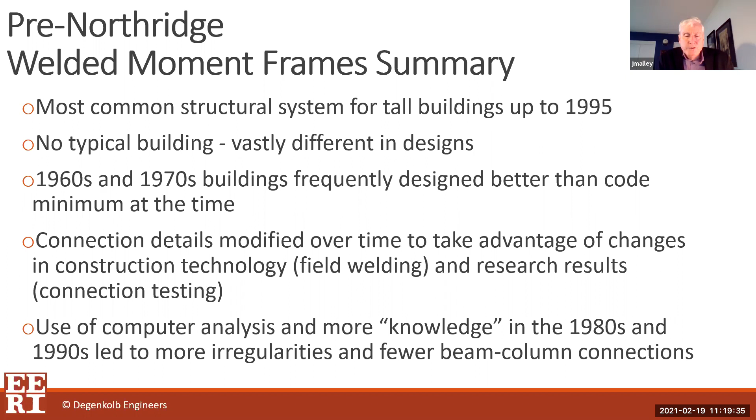So some of the things that we found in studying some of these buildings are that typically you do not see the deformations spread out over the entire height of the building. It's usually in these taller buildings, you're going to get a series of stories, maybe a quarter of the height of the building. A lot of times it is in sort of the middle third from higher mode effects, where we see some of the major demands.

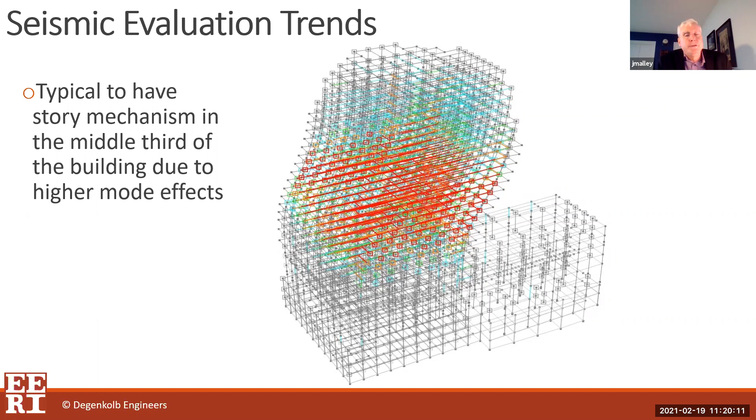And this is some of our software where the different colors kind of tell us where the heavier demands are. Red is obviously the most heavily demanded area.

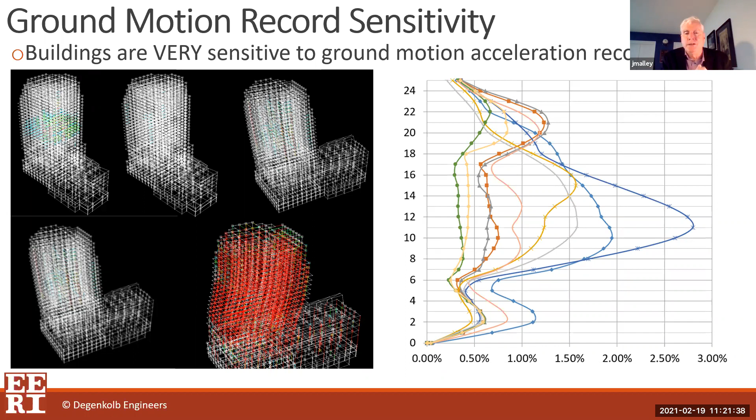Part of this is because we have a system that's a fracture and non-ductile type of response, so it's much more susceptible to changes in ground motion than if this was a very ductile system, hopefully the way we're designing them today, where we're controlling the response and we've got the inelastic deformations well controlled. This spread would be much smaller and we'd see a much tighter result, and that's what we see in new building designs—we don't get this kind of widespread response that we have on these less ductile systems.

So a little more about ground motion intensity. One of the things we've also learned is that when we look at the very large motions, and if we say we just barely meet the criteria, we say, well, what if the ground motion was 10% greater? The earthquake doesn't know it's supposed to be exactly the ground motion that we put into it.

In many cases, there's sort of a cliff. Once you hit the capacity and it gets just a little bit bigger, the deformations can get out of control very quickly. This is sort of a graphic of that, where the median response at the targeted acceptance criteria demand was about 1.6% at most, and then 10% bigger was 2.6%. So it very quickly escalates—these are the kind of buildings that we really watch out for in developing retrofit designs.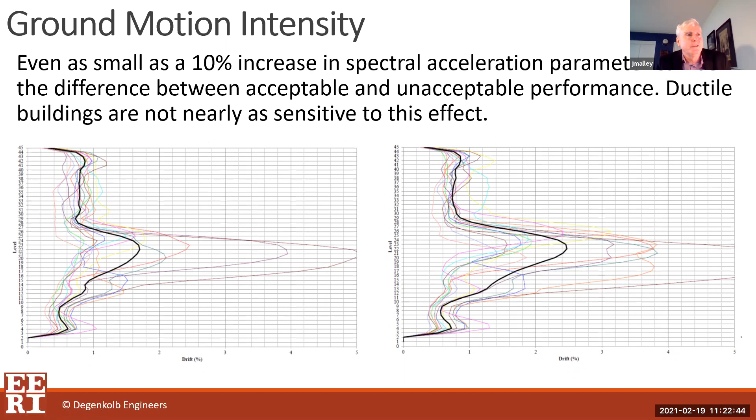Another important thing is how we model the connection fractures, because they are susceptible to this fracture that we saw in Northridge. What we've found is that in many cases, if you just have connection fractures, in most cases we don't think it's going to take the buildings down. And we saw that in Northridge—none of the buildings collapsed that were damaged. That's because there are a lot of other things that help in the seismic response, but we do need to be very careful about how we understand the models.

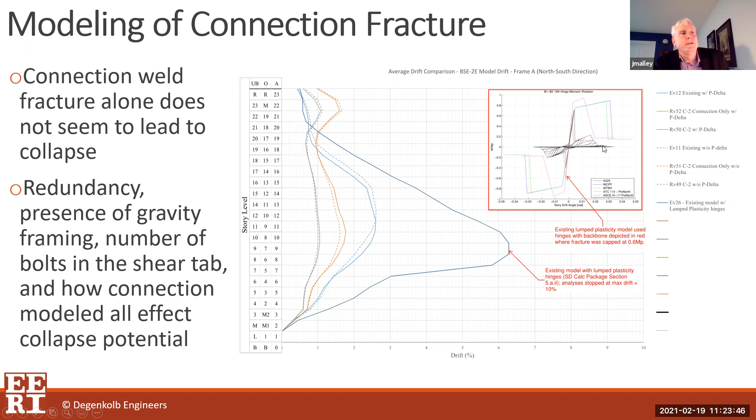We tend to do these fracture models, which are kind of graphically shown here. When we do the fracture models, we use fibers to pick up the fracturing of the connection and to mimic the response that we found in some of those tests done on the pre-Northridge connections.

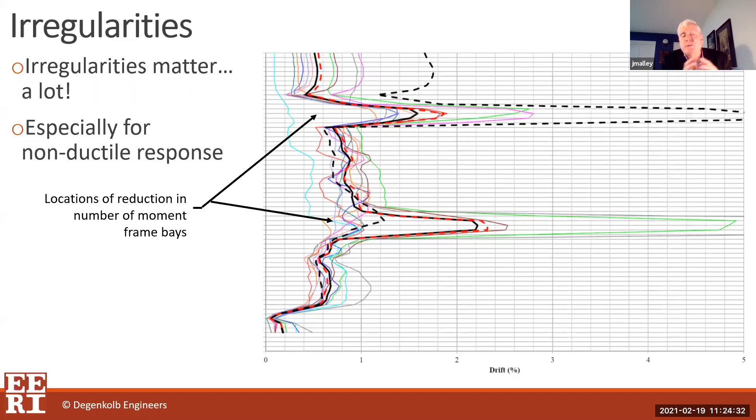Irregularities in buildings—I mentioned that in the 80s when engineers got a little more bold, they could do more analysis, and those irregularities can change the response a lot. You don't see it in elastic analysis, but in nonlinear analysis, especially in non-ductile buildings, the earthquake finds the vulnerable part of the building and really focuses the demands there. When you have transitions in strength or stiffness, you end up targeting a lot of displacement demand on those stories. So it's much more important on non-ductile structures than on our newer ductile structures.

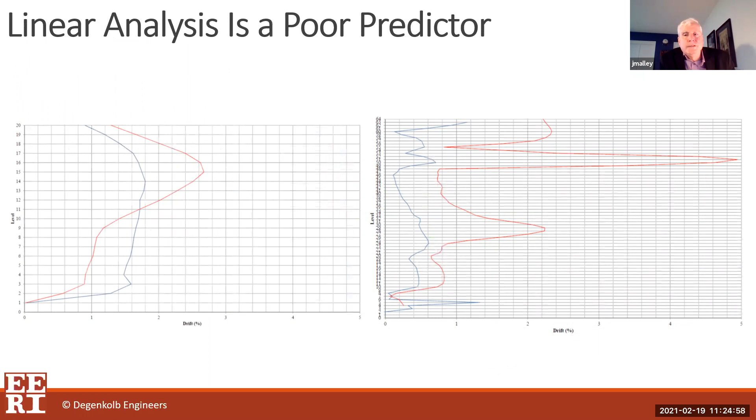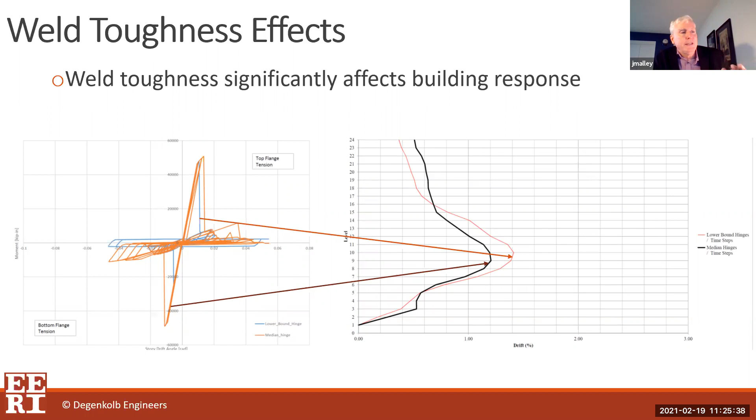The other thing that can be very important is the toughness of the weld metal used in the connections. If we get above a certain level of toughness, fractures probably don't occur. Unfortunately, the weld metal used in the 70s and 80s wasn't as good—older buildings actually had better weld material, since the newer technology that allowed welds to be made faster wasn't as good then. Now we require new technology to have a high level of toughness in all new welds we're putting in, but changes in weld toughness can definitely change the response of the building.

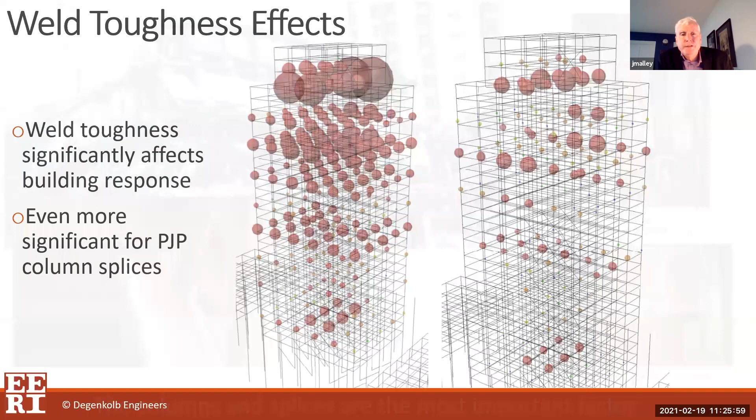We see that most importantly in column splices. Many of these buildings had partial joint penetration column splices, which are also susceptible to fracture, especially with low toughness weld metal. We really feel this is the primary thing that could potentially cause one of these buildings to collapse. We've seen that in the models we do—we actually build fiber models of our column splices to capture the fracture, and that's where we see the biggest demand.

The building on the upper left is from the Pino Suarez Towers in Mexico City in 1985, which was brought down by column issues—very different from what we do in the US, both in the type of columns and their configuration at that time in Mexico.

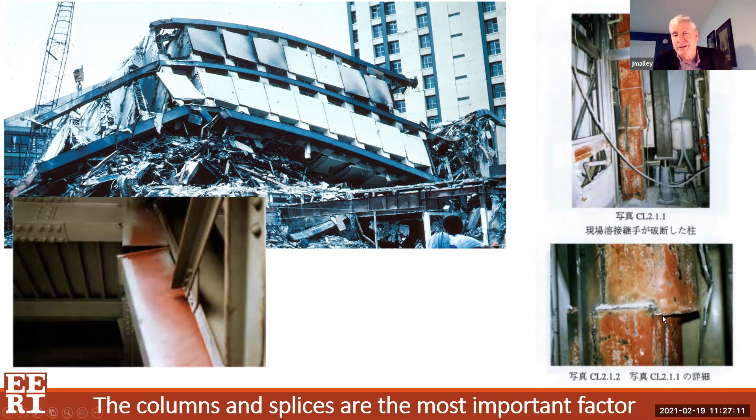The other pictures on this slide are from the Kobe earthquake in 1995. Interestingly, they used box columns there, which we don't use too often in the US. Here's a case where the column splice fractured, actually sheared and moved, and luckily landed on the column below with some deformation but didn't collapse. I don't know if I would have walked into this building to take that picture, but this is pretty scary—if you lose a column splice, that could bring a building down.

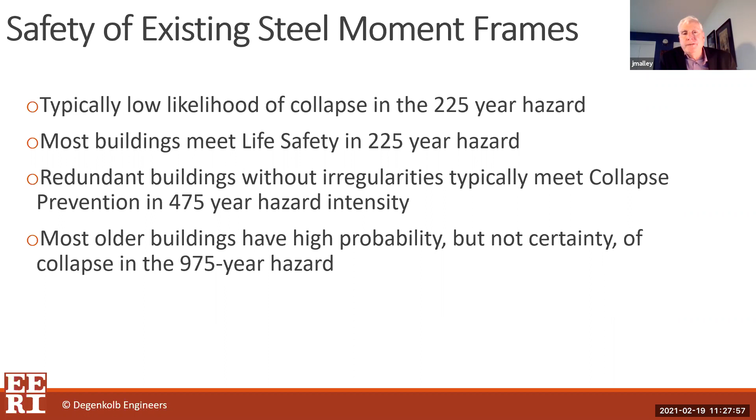So on safety for older moment frame buildings, based on our studies, we think the likelihood of collapse in a roughly 225-year hazard or less is quite low. We start to see issues around the 10-in-50, or 475-year earthquake, which is about where our new buildings are generally designed for risk category 2. But when we get to larger demands, the 5-in-50 demand, about a 1,000-year return period, our models right now are saying there's a pretty high probability of real challenges for these buildings.

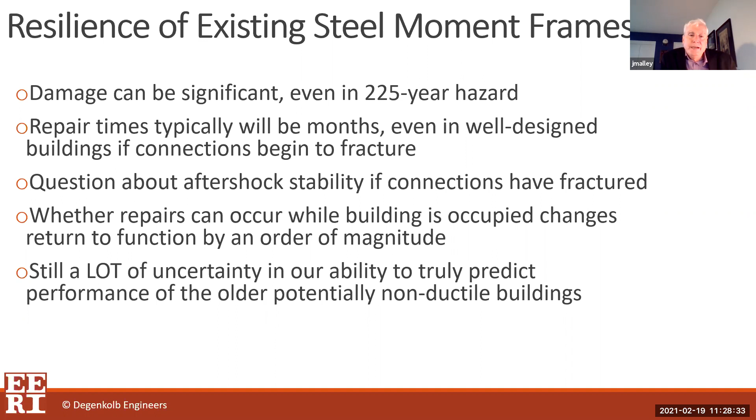Trying to fix these buildings is not simple. If you do have a bigger earthquake, repairing them is going to be quite difficult. There's also the question of aftershocks, and if you have to evacuate the building and everything around it, repairing while something is occupied can be a challenge too. There's a lot of uncertainty in what we're doing because of this non-ductile behavior, lack of knowledge about actual construction of the building, toughness of weld metal, and so on.

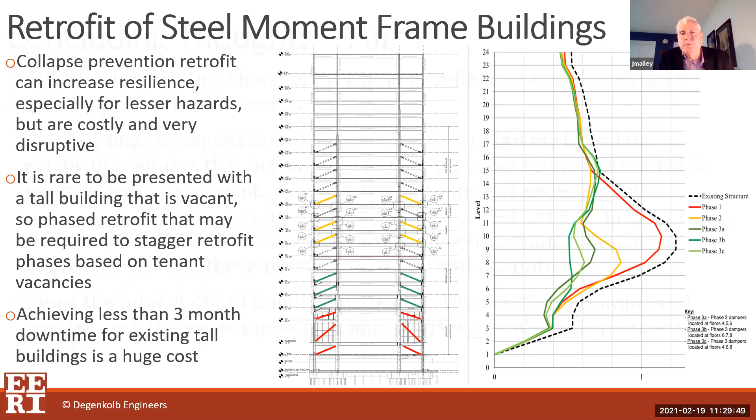So even though we hopscotched around depending on the changes, this is an office building, and when the leases come up, they're going to evacuate the floors for a period of time to do the retrofit before they bring a new tenant in. So that's their long-term plan. The city allowed this to happen. We're through about 4 phases of it now, and there's a couple more to come.

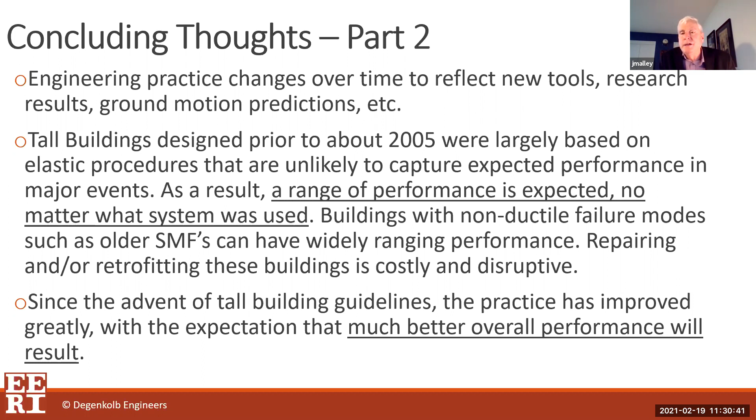So just finishing up, practice has changed a lot over time. We have new tools, new technologies for construction. Our analysis is a lot better. Our understanding of ground motions is a lot better. Buildings designed prior to 2005 were pretty much on elastic procedures. A lot of what we're doing now is performance-based design, directly looking at nonlinear response. So we need to worry about these older non-ductile buildings, not just steel, but concrete. I focused on steel here because of the ones we've been studying. But we feel like the things we're doing now, new construction and the peer review processes, are getting much better performance, or hopefully will get much better performance in the future.